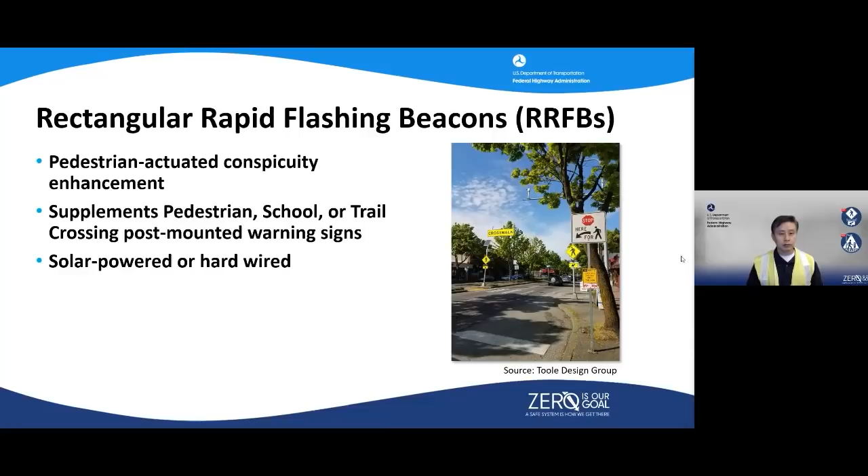Next slide. These can be put at uncontrolled marked crosswalks, whether at intersections or mid-block crossings. Here we have table 1 of the guide for improving pedestrian safety at uncontrolled crossing locations. These are very effective: crash reduction factor of 47%, but as far as yielding rates, up to 98%. But we recommend you go to this table 1 to really look at the appropriate location. We've got the ADTs, the speeds, and the number of lanes as far as the best spots for these. We do recommend typically that these are in the 35 to 40, under 40 mile per hour range, sort of the sweet spot.

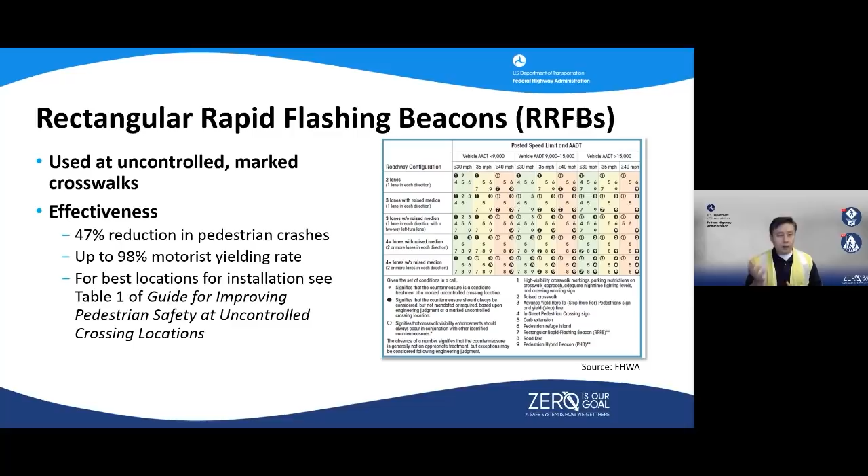Next slide. One of the beauties of these is that they do get your attention, and you need to have 2 at the actual crosswalk location. So at every crosswalk, you'll have one on the right, one on the left, and these are actually great on multi-lane roads. But once again, watch the speeds and the ADTs. If you're using them on a divided highway, you need to have them on both sides, and if you have a median, you can put those in the median as well.

What I really love about these is the flash period is initiated each and every time a pedestrian is detected. As soon as that pedestrian activates that button, these things go on. Drivers draw attention, drivers slow down. Speed is a huge issue for pedestrians crossing the road. The majority of pedestrians get killed or seriously injured when they're crossing the road. So it's a great proven device. You'll see a lot more of these, and hopefully more get out there as we move on. Next slide, please.

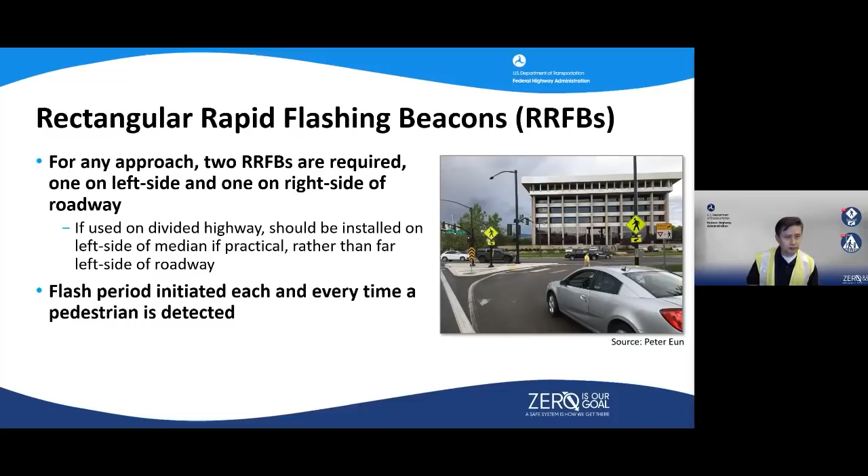It all starts with crosswalks, and instead of the minimal transverse or parallel lines, you can actually improve crosswalks with higher visibility marked crosswalks, but also lighting and other additional signage. If you want to go to the next slide, this is sort of the basis for pedestrian crossings, and these are very low cost.

With regards to the RRFB, you're looking at the 12 to 16,000 range. With crosswalk visibility enhancements, you can look at the 100 to 200 range for certain signs, so they are a lot lower cost. You can use these at mid-block and uncontrolled crossing locations as well as at intersections. These have a crash reduction factor of between 23 and 48%, and we have multiple crosswalk treatments: high visibility marked crosswalks as mentioned, signs, curb extensions, and lighting. These all fall under the enhancements. Once again, going back to table 1 with regards to what's the appropriate context where it's best utilized. Next slide.

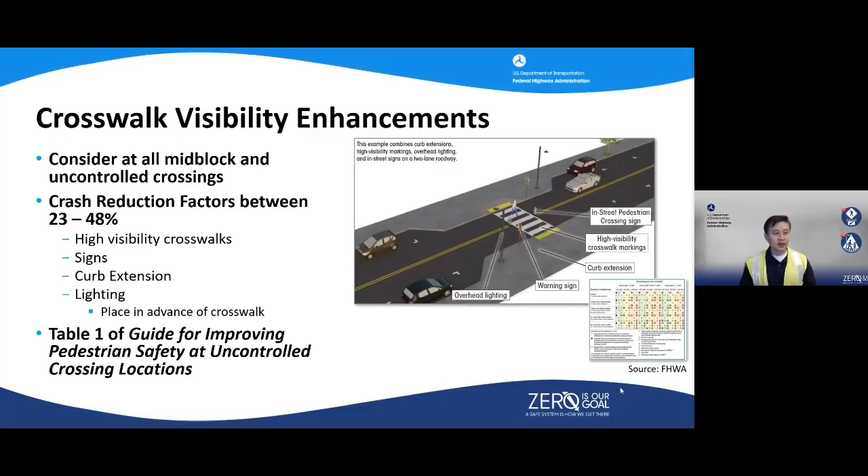And then the higher visibly marked crosswalks that you really want to draw attention to drivers, because crosswalks are for pedestrians to know where they should cross, but also for drivers. So definitely consider these at mid-block crossings. A majority of pedestrians are crossing mid-block where they're getting hit, so installing new mid-block crossings with higher visibility crosswalks is a very good start. There's different materials you can use, whether inlay, thermoplastic, paint or brick, but going with higher visibility continental, or sometimes called piano keys where they're offset a little bit, these do have a crash reduction factor of injuries going down by about 40%.

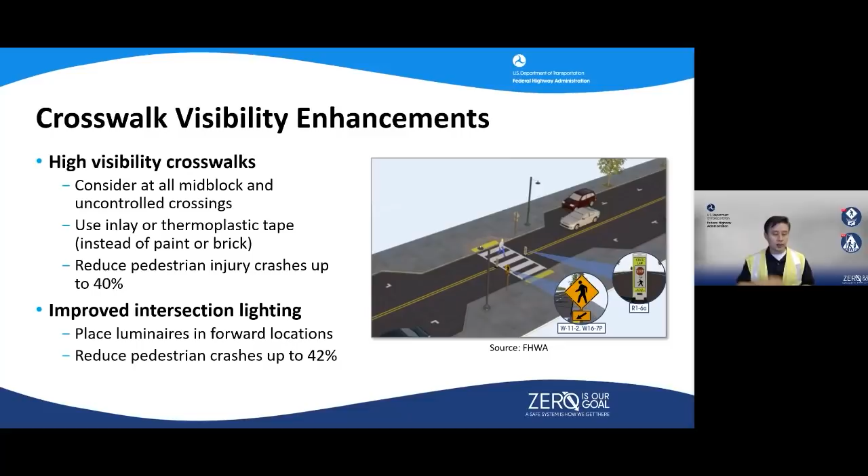And then we've got improved intersection lighting with regards to crosswalks as well, a 42% reduction, a win-win between pedestrians and vehicles. You're really lighting because a good percentage, over 50%, of pedestrian crashes happen during the dark, at nighttime or in dark conditions.

And as far as signing, in addition to your W11-2, you can have advanced yield or stop signage and markings where you're stopping vehicles about 20 to 50 feet, with the sweet spot being 30 feet in advance of the crosswalk. This really helps with the multi-threat situation, opening up those sight triangles. And then the in-street pedestrian sign as well, used at lower speed locations, reminds drivers that it is the law, depending on the state, to yield or stop to pedestrians. It works great with education campaigns, reminding that the law requires you to yield or stop to pedestrians at crosswalks, whether marked or unmarked.

So there's this whole range of ways to improve pedestrian crossings.

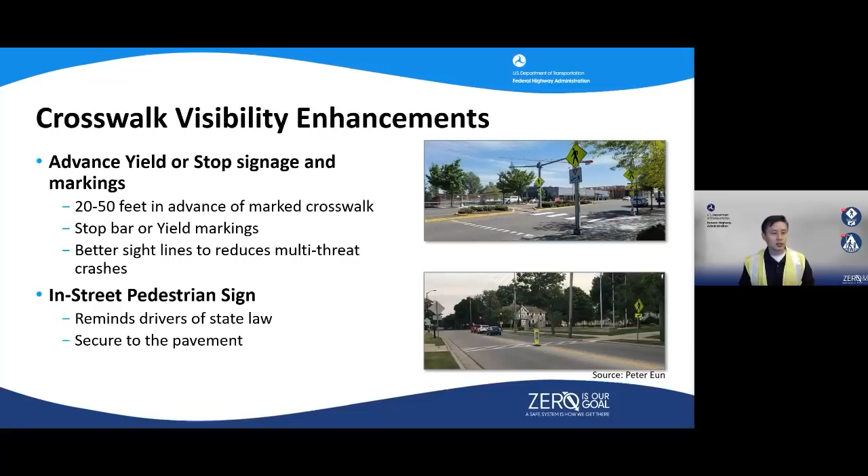Most fatal and serious injury bicyclist crashes occur at non-intersection locations, including nearly one-third of bicyclists who die from crashes involving overtaking motorists. To improve safety for bicyclists, agencies can consider including bicycle lanes, which are a dedicated facility for the use of bicyclists along the roadway adjacent to motorized vehicles.

Bicycle lanes can be included on new roadways, or created on existing roadways by reallocating travel lane and shoulder widths. In addition to the paint stripe used for a typical bicycle lane, a lateral offset with a painted buffer can help further separate bicyclists from vehicle traffic and improve comfort for those bicyclists.

State and local agencies may also consider physical separation of the bicycle lane from motorized traffic lanes through the use of vertical elements like posts, curbs, or vegetation. Based on international experience and implementation in the United States so far, there is potential for further safety benefits associated with separated bicycle lanes, sometimes also referred to as cycle tracks.

Separated bicycle lanes align with the safe system approach principle of anticipating human mistakes, where separating users in space can enhance safety for all road users. FHWA is conducting research on separated bicycle lanes, which includes the development of crash modification factors, expected to be completed in 2022 to address the significant interest we've seen in this topic.

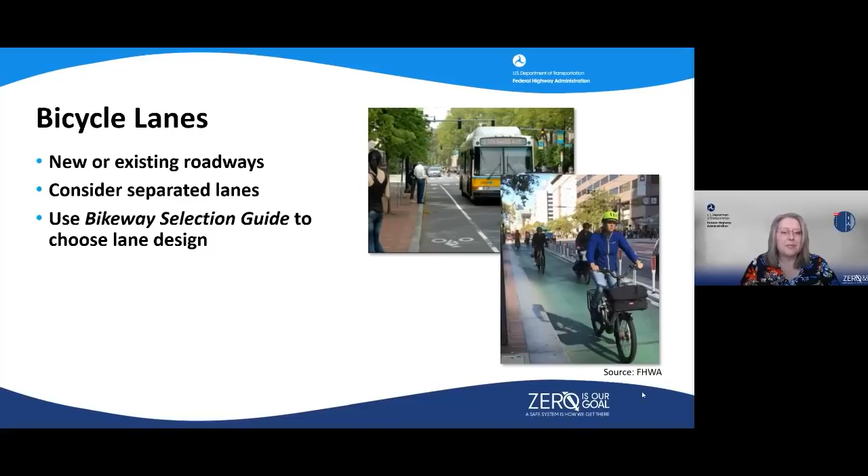Research indicates that roadways where travel lane widths are decreased to add a bicycle lane did not experience an increase in injuries or congestion. This applies to all crashes on roadways classified as principal arterials with no control of access in urban areas.

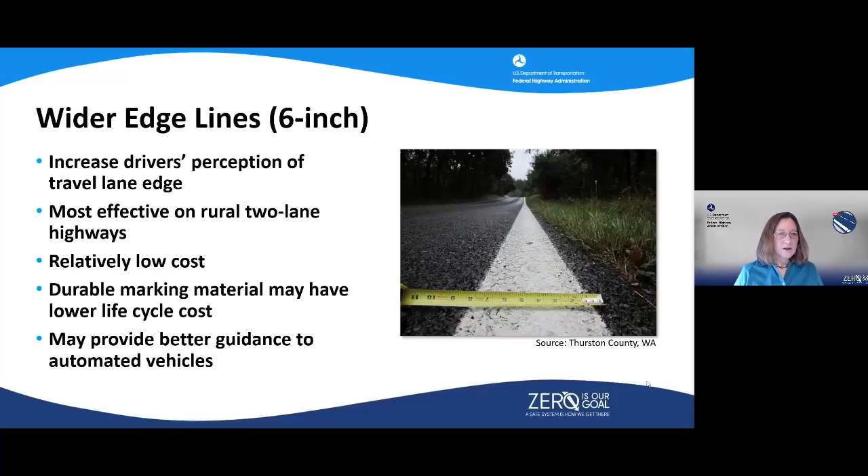Wider edge lines can reduce crashes up to 37% for fatal and injury crashes on rural 2-lane roads, and up to 22% for fatal and serious injury crashes on rural freeways. Very effective for a small cost. Wider edge lines can also have a benefit cost ratio of 25:1 for fatal and serious injury crashes on 2-lane rural roads. Now, Joe Chung, a safety engineer with the Office of Safety Technologies, will walk us through lighting and friction management. Thank you, Kate.

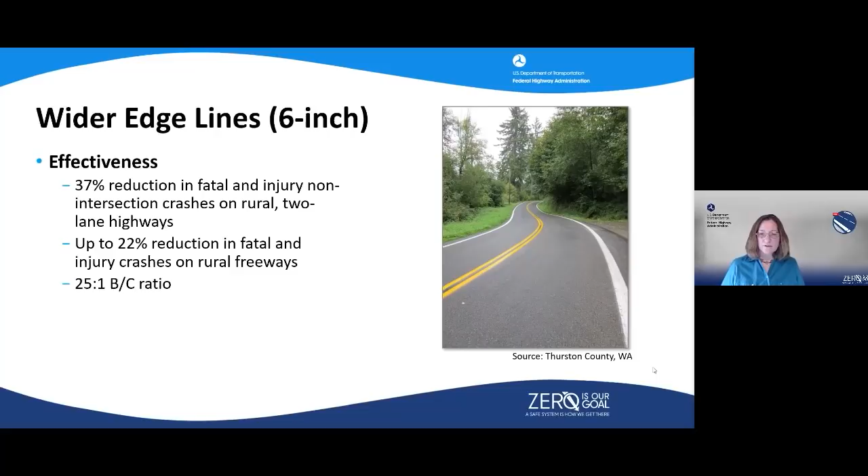Phil, go ahead and advance the slide. For lighting, we know that lighting enhances our ability to see what's ahead, whether when driving, walking on sidewalks along the roadways, or crossing the streets. Nighttime fatality rate is 3 times the daytime rate, even though only 25% of vehicle miles traveled occur at night.

At nighttime, vehicles traveling at high speed may not have the ability to stop once a hazard or change in the road alignment ahead becomes visible by the headlights. Similarly, pedestrians cannot detect hazards along the walking path at night or be seen by motorists when trying to cross the street. By applying lighting continuously along segments and at spot locations such as intersections and pedestrian crossings, it significantly improves overall visibility, increases sight distance, makes roadside obstacles more noticeable to the driver, and minimizes nighttime crashes.

We all use different forms of LED lighting fixtures in our homes because they are more energy efficient and appear brighter. LED lighting technology also affects roadway lighting. LED lighting provides far superior precise control in reducing excessive light affecting nighttime sky glow, and also minimizes spillage over to adjacent properties. It also allows for adaptive lighting control to customize the light level according to the needs for a specific time period at night.

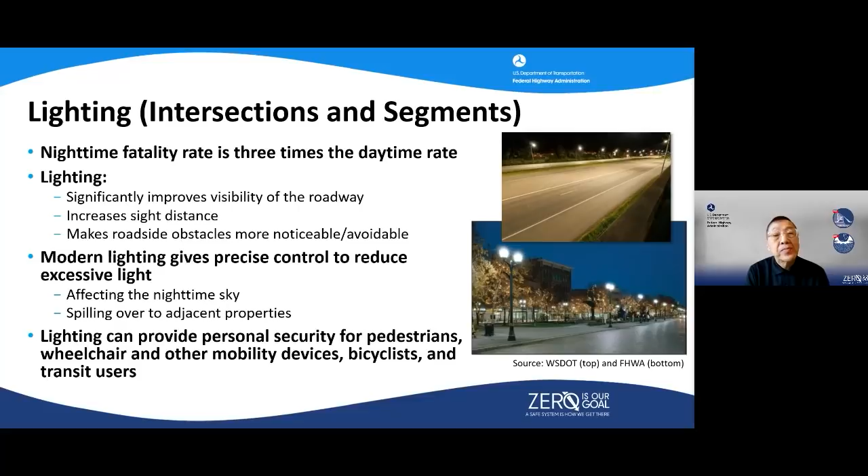Research shows that applying lighting at intersections can reduce crashes up to 42% for nighttime injury pedestrian crashes at intersections, and 38% for nighttime crashes at rural and urban intersections. For road segments, agencies can consider continuous lighting on both rural and urban highways, including freeways. Research showed that lighting can reduce crashes up to 28% for nighttime injury crashes on rural and urban highways.

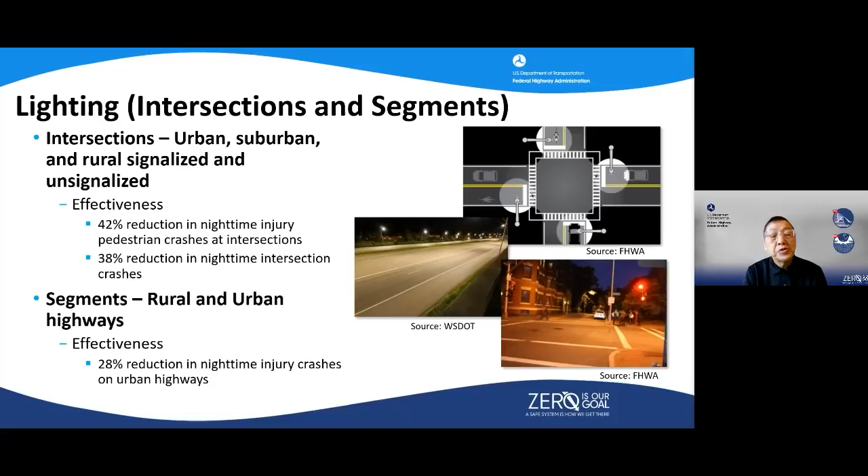As part of this effort, FHWA is developing a 3 to 5 minute video on lighting that will feature a case study from Florida DOT. Additionally, FHWA anticipates publishing a pedestrian lighting user guide later this year or early next year. Next slide, please.

So, pavement friction. Friction provided by a roadway surface affects how vehicles interact with the roadway, including the frequency of crashes, and measuring, monitoring, and maintaining pavement friction—especially at horizontal curved road segments with small radius, lack of super elevation, and at locations where vehicles are frequently turning slowly and stopping, which is fairly typical at intersections—can prevent many roadway departure, intersection, and pedestrian-related crashes. These proven safety countermeasures include continuous pavement friction measurement, or CPFM, and high friction surface treatment, HFST.

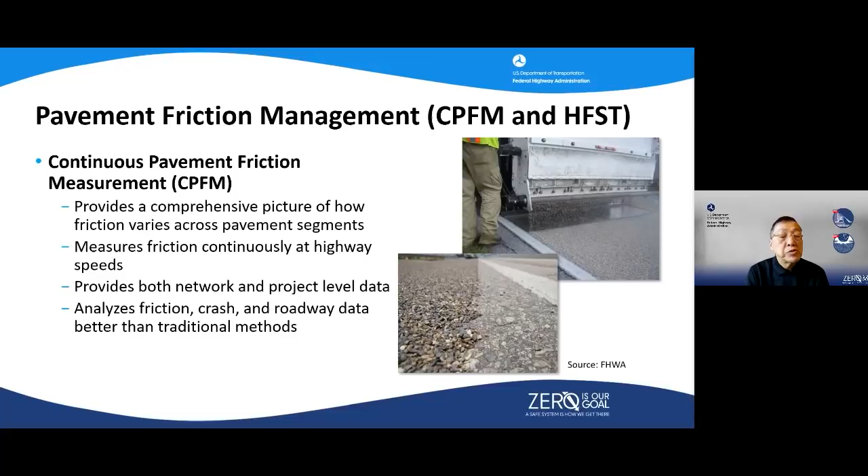High friction surface treatment was one of FHWA's Every Day Counts 2 safety initiatives. It is an application of very high quality aggregate, typically calcined bauxite, which is polish and abrasion resistant, applied to the pavement using a polymer binder to restore and enhance pavement friction at existing or potentially high crash areas associated with friction demand issues. It is highly effective in reducing hydroplaning on wet surfaces. As most of you are familiar with HFST, it was part of the existing proven safety countermeasures under the heading of enhanced delineation and pavement friction for horizontal curves.

However, when added to the list of proven safety countermeasures a few years back, it was limited to horizontal curve application only. However, since then, we have a lot more experience with HFST in other applications. So creating a standalone proven safety countermeasure makes sense and allows us to be more inclusive of other non-curve locations where friction demand is driven by the ability to perform short-term maneuvers such as sudden braking, lane changes, and minor changes in direction within a lane. It's evident that in our everyday driving on a highway system, we encounter interchange ramps, intersection approaches, and approaches to crosswalks as well. So CPFM and HFST can certainly enhance the safety aspect of those locations.

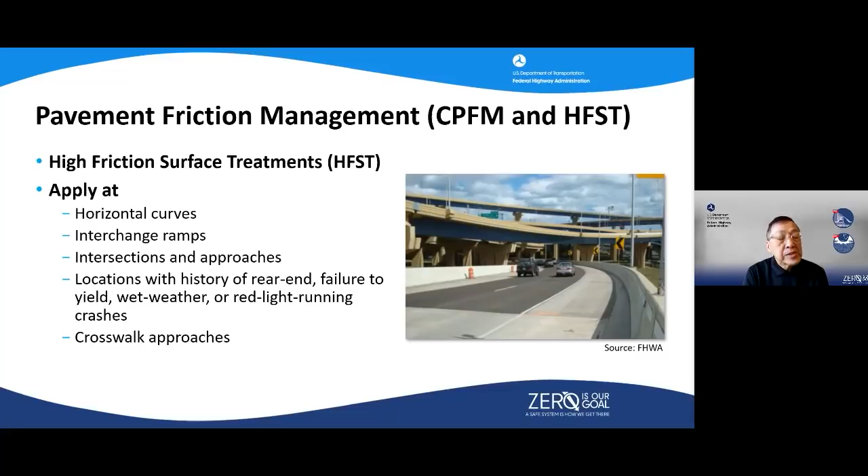As far as effectiveness, HFST can reduce crashes up to 63% for injury crashes at ramps, 48% for injury crashes at horizontal curves, 83% for wet crashes, and 20% for total crashes at intersections.

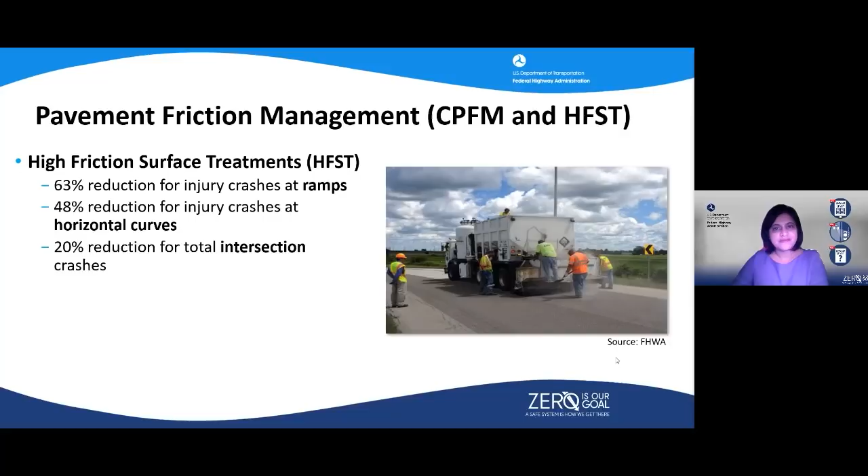Thanks, Joe. I'm Onisha, and I'll be leading you through the next set of PSCs focused on speed management, starting with variable speed limits.

Our variable speed limits are speed limits that change based on different conditions. VSLs improve traffic safety and flow by reducing speed variance. VSLs can also improve driver expectation in advance of slowdowns and lane closures. VSLs may be implemented to alleviate congestion, manage speeds during traffic events such as incidents or work zones, and reduce speeds during inclement weather.

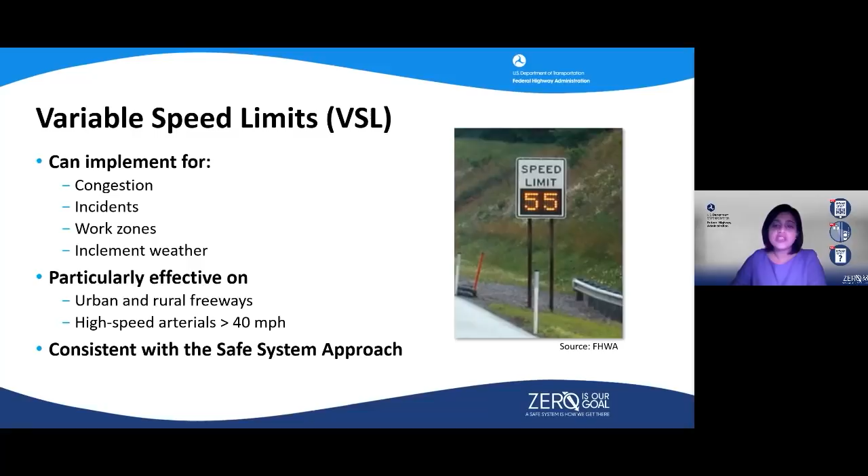Based on available research, VSLs are most effective when implemented on urban and rural freeways and arterials with speed limits greater than 40 miles per hour. VSLs reduce speeds so that human injury tolerances are accommodated by improving visibility, providing additional time for drivers to stop, and reducing impact forces. In this way, VSLs are integral to the safe speeds element of the safe system approach.

As far as effectiveness, VSLs can reduce crashes on freeways by up to 34% for total crashes, 65% for rear-end crashes, and 51% for fatal and injury crashes.

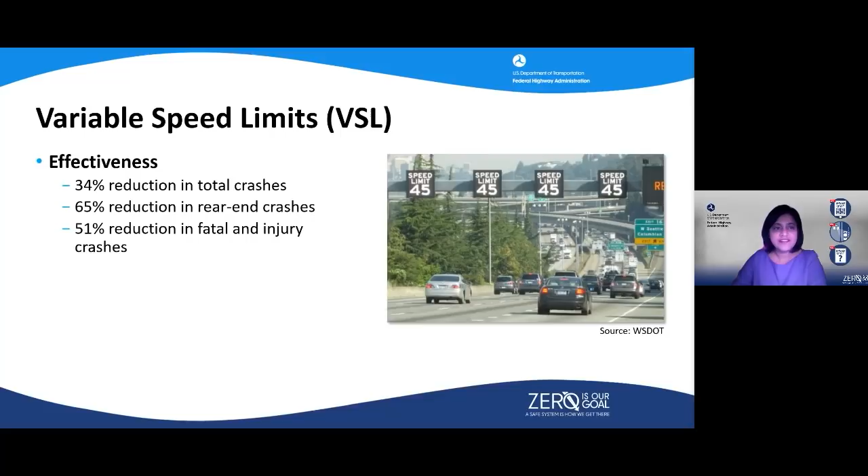So our next PSC is speed safety cameras, or SSCs. Quite a number of abbreviations there.

SSCs use speed measurement devices to detect speeding and capture photographic or video evidence of vehicles violating a set speed threshold. Agencies can use speed safety cameras as an effective and reliable technology to supplement more traditional methods of enforcement, along with engineering and education, to alter the social norms of speeding and effect much needed progress in reducing speeds. Agencies should definitely conduct a network analysis of speeding-related crashes to identify locations to implement SSCs.

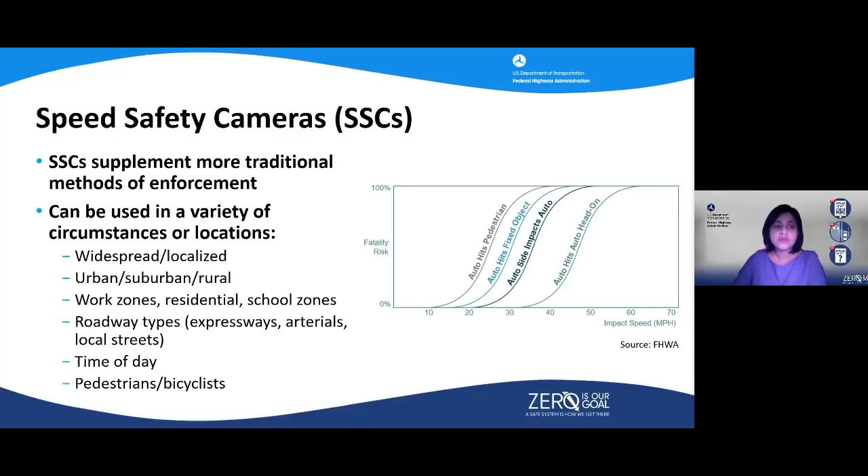SSCs can be deployed as a fixed unit, which is a single stationary camera targeting one location, or a point-to-point or P2P unit, which has multiple cameras to capture average speed over a certain distance, or a mobile unit, which is a portable camera, generally in a vehicle or trailer.

When implementing SSCs, agencies should consider the following. SSCs should always be planned with community input and equity impacts in mind. With proper controls in place, SSCs can offer fair and equitable enforcement of speeding, regardless of driver age, race, gender, or socioeconomic status. Remember, public trust is very vital to the success of any SSC program.

Always use a mix of, if possible, overt, that is highly visible, and covert, that is hidden enforcement, to encourage drivers to comply with speed limits everywhere. Conduct a legal and policy review to check if SSCs are authorized within your jurisdiction. And finally, consult USDOT's SSC guidelines. This guide was published in 2008 and is currently undergoing an update.

So how effective are speed safety cameras? Fixed point units can reduce crashes on urban principal arterials by up to 54% for all crashes and 47% for injury crashes. And in New York City, they were found to reduce speeding by up to 63% during school hours.

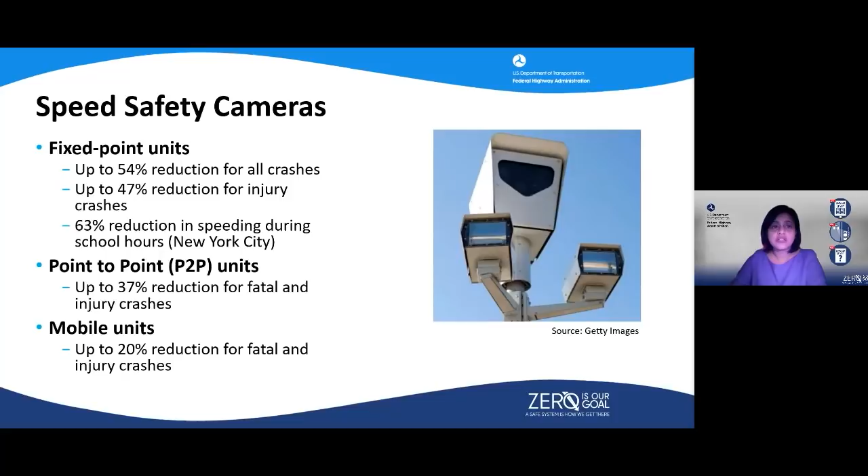So this brings us to our last PSC, appropriate speed limits for all road users, which, as Phil mentioned before, will be replacing the existing US Limits 2 PSC. In previous iterations of the PSC initiative, we promoted the use of US Limits 2. However, since then, the state of knowledge and the practice of speed limit setting has evolved.

And for us here at Federal Highway, the safe system approach has been part of this evolution. The safe system approach places special emphasis on safe speeds, which is one of its core elements. So even though this is not a brand new PSC, but somewhat of a revision of an existing one, we believe the revisions to be significant enough to warrant a special mention here today.

In 2019, speeding killed 9,478 people, representing 26% of US highway fatalities. As we all know, we humans are unlikely to survive high-speed crashes. 9 out of 10 pedestrians, if hit by a vehicle traveling around 20 miles per hour, are likely to survive. But only 1 out of 10 pedestrians will likely survive an impact at around 60 miles per hour.

Higher vehicle speeds increase not only the severity of a crash, but also its likelihood, because higher speed diminishes the driver's ability to recognize and avoid potential conflicts.

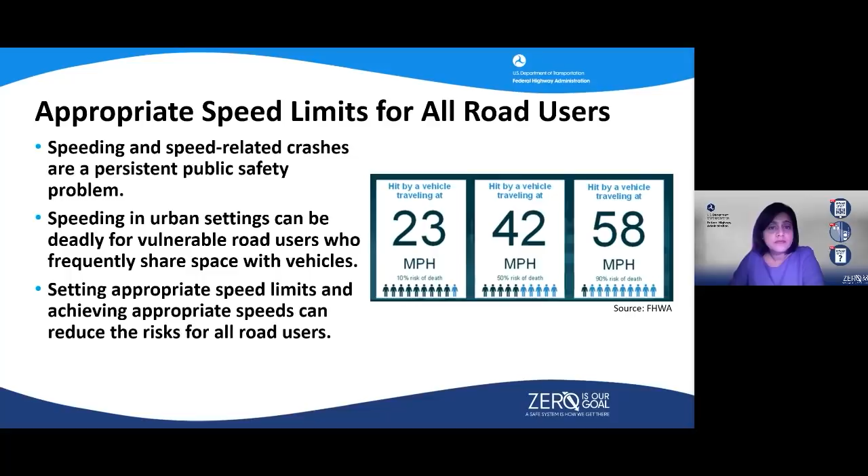State and local transportation agencies are generally responsible for setting and enforcing speed limits on roadways under their jurisdictions. They may do so statutorily or non-statutorily. Statutory speed limits are established by legislative action for a particular class of highways with specific design, function, and jurisdictional and/or locational characteristics, while non-statutory speed limits must be based on an engineering study. They should be conducted in accordance with the MUTCD and involve multiple factors and take into account engineering judgment.

The Federal Highway Administration's Methods and Practices for Setting Speed Limits informational report, published in 2012, is a good resource for practitioners on this matter. But with this new PSCs, agencies are also being encouraged to use the expert system approach. The expert system approach relies on a knowledge-based decision support process developed by subject matter experts to provide consistent results. Practitioners interested in this approach may use US Limits 2 or the posted speed limit setting procedure and tool developed as part of NCHRP Report 966.

Another approach to consider is the SAFE system approach to setting speed limits, which aims to minimize the anticipated impacts of a crash and thereby reduce the risk of death or serious injury for all road users. Based on international experience and implementation here in the United States, the use of 20-mile-per-hour speed zones or speed limits in urban core areas where vulnerable road users share the roadway with motorists may result in further safety benefits.

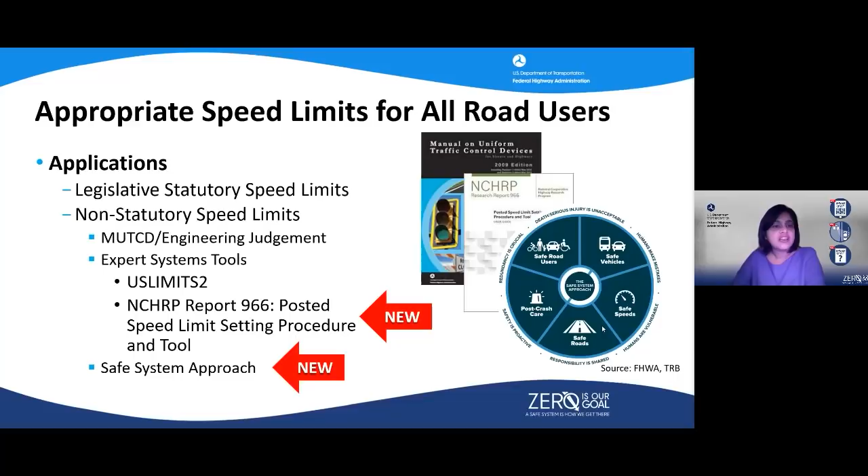When setting a speed limit, agencies should consider a range of factors such as pedestrian and bicyclist activity, land use context, crash history, intersection spacing, roadway functional classification, traffic volume, and observed speeds. Implement self-enforcing roadways, traffic calming, and speed safety cameras in concurrence with speed limit setting.

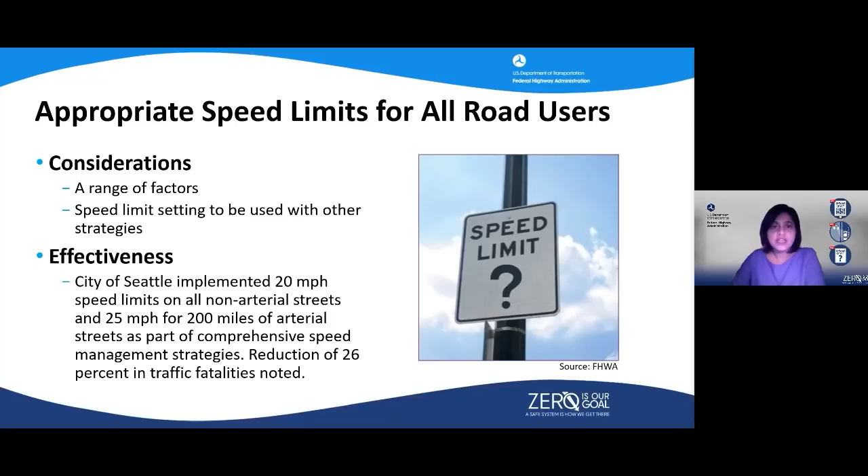As far as effectiveness is concerned, traffic fatalities in the city of Seattle decreased 26% after the city implemented comprehensive citywide speed management strategies and countermeasures. This included setting speed limits on all non-arterial streets at 20 miles per hour and at 25 miles per hour for 200 miles of arterial streets. And with that, I will hand it back to Phil.

Okay, thank you, Anisha, and thank you to all of our SMEs for that brief overview on each of the 9 new PSCs. Now that we did finish that overview, I'd like to transition now to review some of the materials, both new and updated, that we've developed as part of this update.

We're going to start with the web pages. Please note that some of the functionality that I'm going to show as part of this presentation, some of the screenshots, that functionality has not quite been enabled on our web pages yet. We do continue to work with our IT to enable that, and we're very hopeful that it should be added very soon.

So the web pages received an updated look and branding, but retained the icons and the one-page handouts or content for each of the PSCs. With the initiative now containing 28 countermeasures, the website received new features to better organize the PSCs and to help users find the right solution to their issues.

First, the homepage was organized into 5 areas: speed management, roadway departure, intersection, pedestrian and bicyclist, and cross-cutting, with each of the countermeasures listed under those headings. The website will also feature enhanced functionality, including a text search capability and a new filter tool.